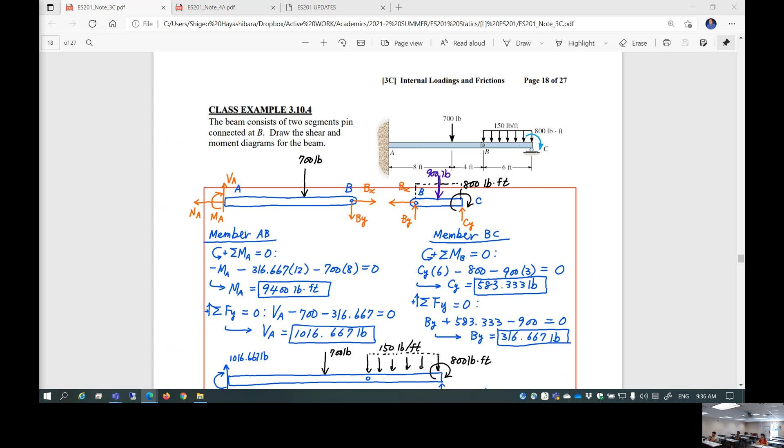Let's move on. I think we stopped at class example 3, case 4: shear moment diagram. Before we draw the shear and moment diagram—this isn't even a simple beam, it's an assembled beam, making your life more miserable. In other words, you have two free body diagrams, and you have unknowns 1, 2, 3, 4, 5. How many unknowns do you have? Anyway, you have more bodies, so for each body you apply up to 3 equations of equilibrium and solve those unknowns simultaneously.

So first, your task is to find out those support reactions. This is a fixed support reaction, this is a pin support reaction, this is pin, and this is a roller support. You have to find out the relevant ones - not all of them, since you're not interested in Bx and Na because those are normal forces, and normal forces don't come into the shear moment diagram, so I don't even attempt to find those. I wanted to find out moment reaction Ma, shear support reaction at A, pin reaction By, and roller support reaction Cy. That's the only thing I found.

Then I assembled it again, trying to construct this as a composite beam. If you assemble it, the support reaction at pin B disappears, because I assembled it up. But this is the external support reaction moment and shear. This is an external support reaction shear. This is externally applied bending moment. This is distributed loading, and this is a point force.

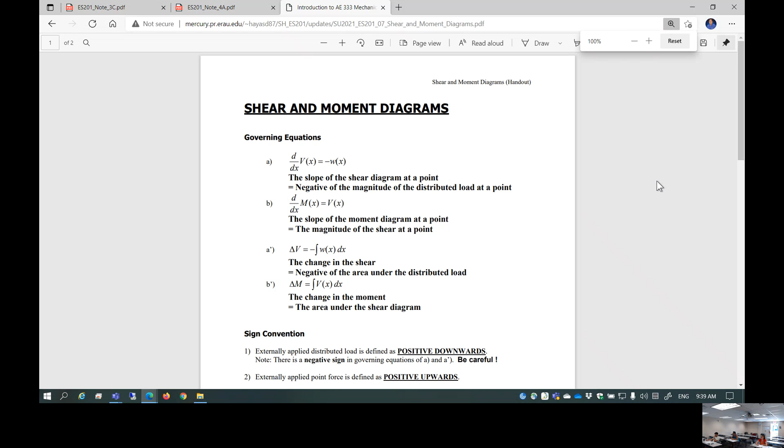So now, starting with the shear diagram, of course you're going to start with 0. And then at the very end, you have 1016.667 shear force going in the positive upwards direction. So you're going to have a jump this much.

So what is this value here? Obviously 1016.667 pounds right here. And then what happens? It stays constant for a while.

Until you hit this force - 700 pounds force. What does that give you? It gives you some kind of change of the shear. What is it? Going down, isn't it? By how much? 700 pounds. Making sense?

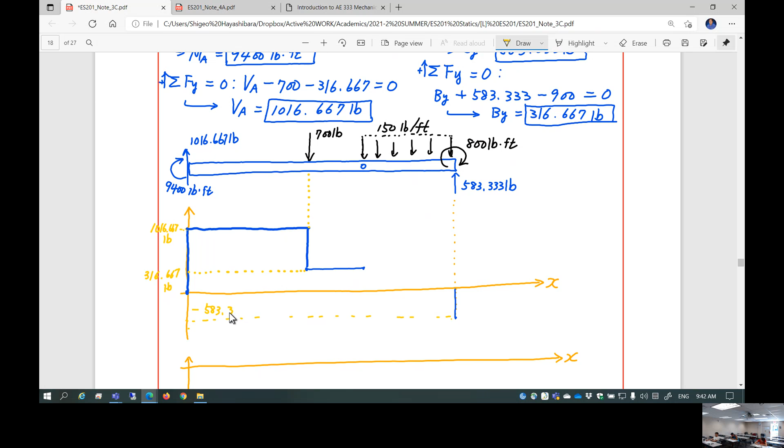What's this value? Minus, yes, minus 583.333 pounds, that's right. And I'm going to draw a straight line in between, with slope negative 150 pounds per foot.

So that gives you this crossing point - do you know where? You can determine this crossing point if you need to, right? You can tell: 316.667 minus 150 times x is equal to 0. What is x? You can find it if you need to. What is x, by the way? I'm kind of curious, so I'm going to do a quick calculation to find out this crossing point.

So this crossing point can be found starting from 316.667, subtract 150 pounds per foot times x, set equal to 0. X equal to, measuring from here... you got it, you got it - 2.11? Okay, 2.11 feet, that's right.

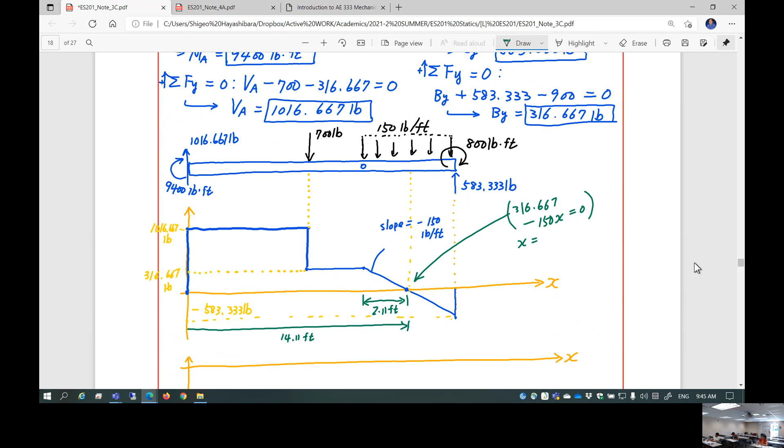Okay, so next is the moment diagram. The moment diagram requires the shear diagram.

Okay, so let's very carefully approach it. First of all, of course, start from 0. Then you have a huge reaction moment that shows up here. Reaction moment 9,400 pound-foot. Is this positive or negative?

This is actually negative. Let's go back and take a look at the handout. So this is positive, okay? That's the sign convention. So let's be careful. If you apply the moment reaction this way, it's going to be negative, okay?

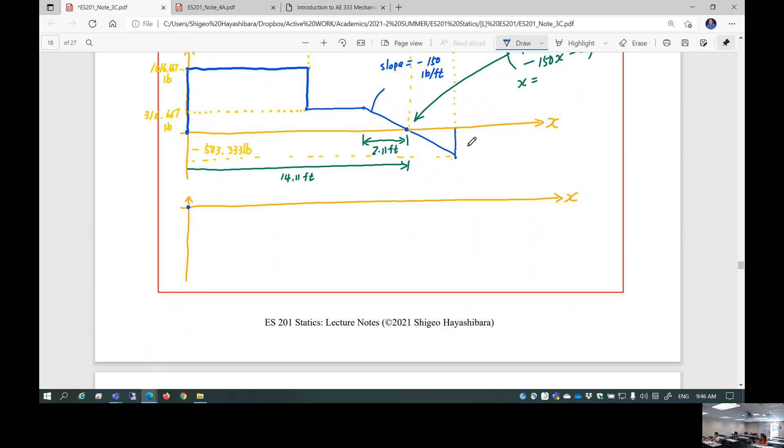Wait, but on the graph it shows a huge drop. That's right, a huge drop in the moment. But that's for it being counterclockwise.

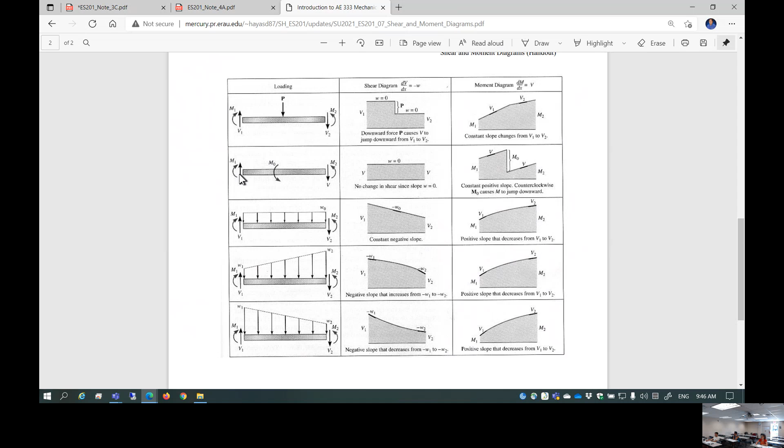Ah, okay, sorry, let's take a look at M1. This is the external moment, the point moment applied. It's going to be negative. That's right, this is negative. That's why it's negative.

So this is going to be a huge drop right here, this much. So obviously you have minus 9,400 pound-foot moment to begin with at the very end. But in here you have the same direction of moment and it goes up. Yeah, it should go up.

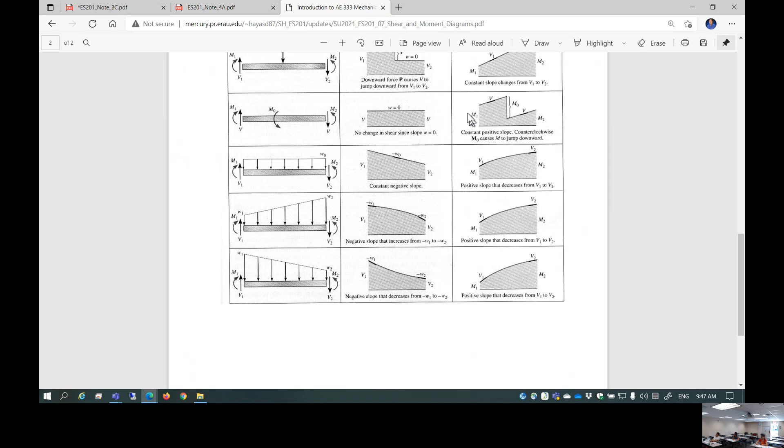Let me double check. Yeah, sorry, sign convention wrong here. Because I'm saying this is unknown direction, and then I said this is positive, and then I got the positive value means this is the direction. Okay.

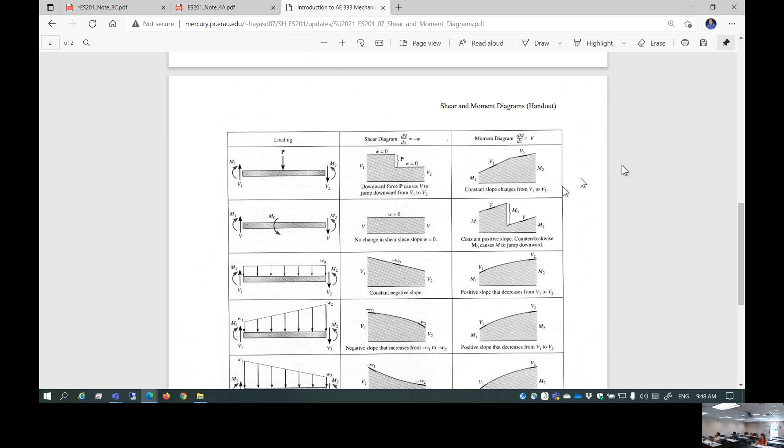I think you should have done minus on the first one when you computed it. So it means that direction, then minus, yeah, I guess so. I think my problem is, okay, yeah, I guess you're right. Since this is a sign convention, I should have done, okay, let me just correct. Since this is a sign convention, this is positive direction, then I got a minus sign come up, right?

So, yeah, that means in reality this is actually opposite. Sorry about that. Yeah, I think so. Good point. So this is in reality the direction, isn't it? Because I'm taking this positive. If I do that, MA comes up negative. Negative, that's right, so that's why negative.

Wait, so did you change the direction of what's positive in the moment? No, this is just basically an arbitrary choice, because I arbitrarily said this is positive or that is positive. That's arbitrary. So I could have taken it like you did in the beginning. I guess the important thing is this is the sign convention. This was just arbitrarily saying, hey, that's just some moment, and temporarily saying this is positive direction. This is not sign convention. This is sign convention, so if you stick with the sign convention, it's actually negative.

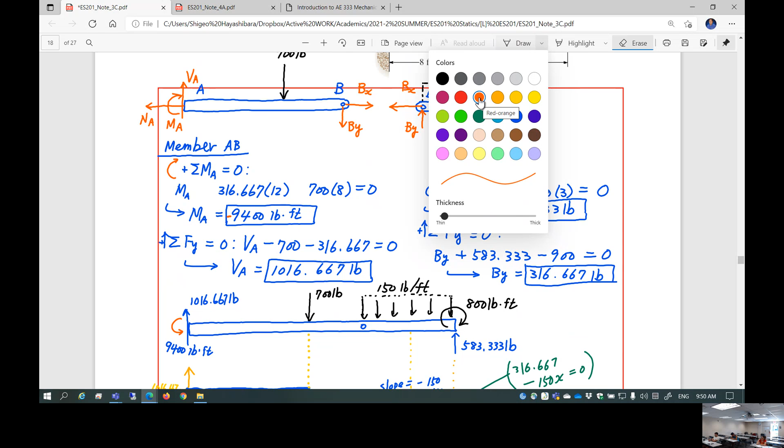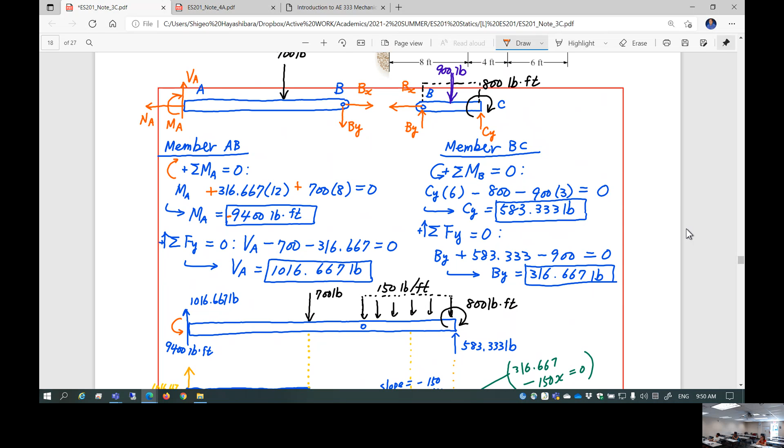I think that's what the problem really is. Okay, so that means let me just fix here, since I took everything in the wrong direction. So this is positive. Sorry about that, so this is positive, and this is positive, and this is positive. Then it's going to get negative. Okay, then following through the sign convention, it's going to be this direction. That is negative, okay. That's what it is, I think. Is that right? I hope so.

Okay, so now this is negative, that's right. Negative jump at the support reaction here to begin with, okay? And then you know that the magnitude of the shear is...

1,016.667 from here all the way to 700 pounds external force here. So you have, okay, you have a linear function with positive slope 1,016.667 from here to there. So from here to there you have a linear function in which you have a slope of 1,016.667 pounds. Okay, it actually gives you the value right here.

What is the value right here? You know this is 8 feet. So minus 9,400 plus 1,016.667 times 8. That is the value here. Still negative, though.

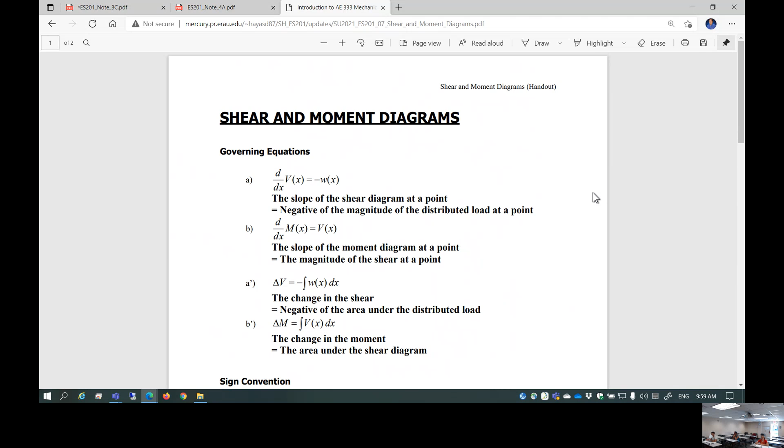So please take it seriously. This is my honest advice for any engineering student because they are bombarded with so many wrong information from peer students. Okay. Engineering could be lots of fun. Major exam could be entertainment if you do the right thing. Okay, all right, anyways, I'm not preaching, so please stop me if I start saying those things.

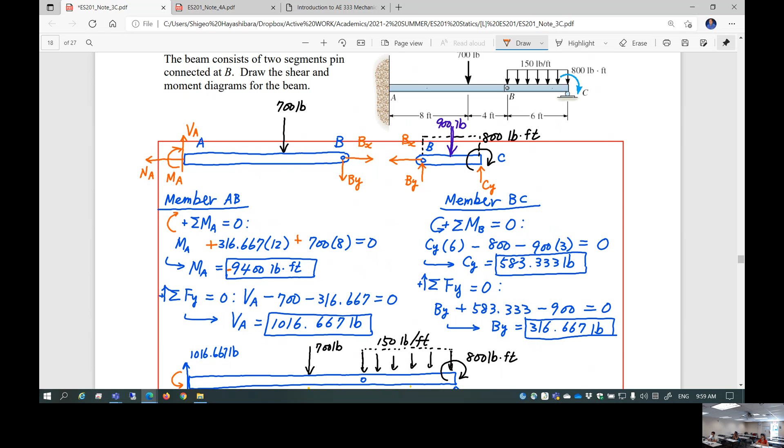Anyways, do you have any question about this shear moment diagram? This is actually challenging because this is a composite beam. You have to disassemble, find out support reactions. That's one thing. And also you start drawing the figure, you have to be very careful about sign convention. I think I even made a mistake in my solution and nobody pointed out in the past. I have to fix it today.

I'm sorry. You're good, actually. You pointed out, I appreciate it.

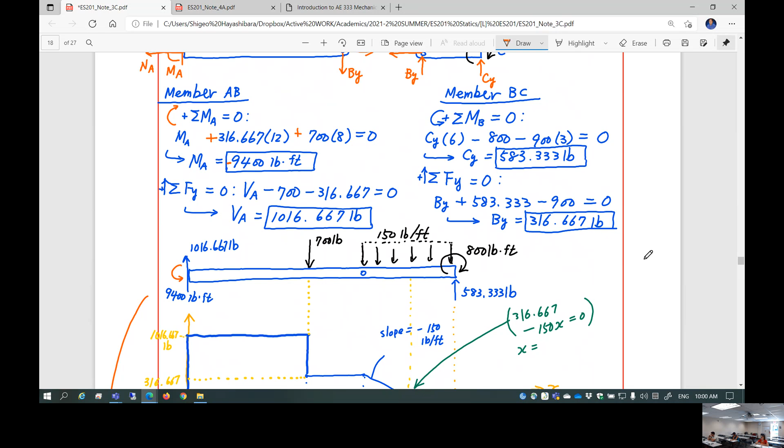Go ahead. So how did you get the area under the curve of that being the 2.11 feet and the 334 pound-feet? Yeah, so you want to have a change of moment starting from this point to that point. You know that the moment changes, delta m. That is essentially integrating the function of this thing. That's what the equation says. Basically, the change in the moment is the area under the shear diagram, which is coming from this equation, which is integration of this equation, right?

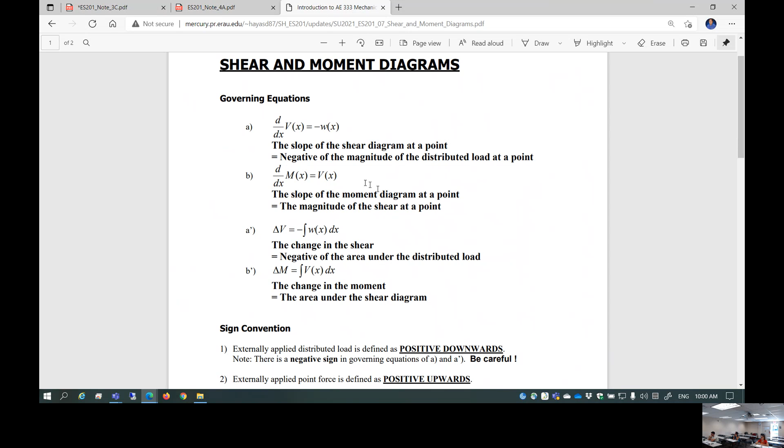Integration literally means that if we plot the function, you're going to find the area under the curve. That means delta m in the range from here to here is basically how much change of shear you have. So this area is equal to this delta m.

This delta m from here to here is this area. And how did you find that area? 2.11 times 316.667 divided by 2, because it's a triangle. Yep, because this is a straight line. So if you were to do an integral, could you do like integral from 0 to 2.11?

No, not 0 to. This is like 12 to 14.11, right, in the range of x. With the function given, you have to figure out this function. This is a linear function, y equal ax, y equal negative ax, and also you have to find the crossing point. That's a linear function. So if you integrate that linear function over that range, that is effectively the area under that curve, which is a triangle. That's why.

Okay, good point. Any other question?

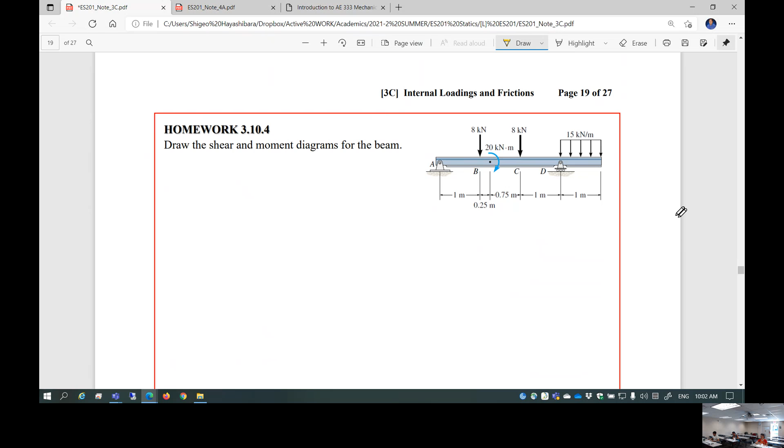Obviously, shear moment diagram requires practice. So this is your homework assignment. Again, this is a simple beam, you don't have to disassemble. This is actually a single reaction force, right? So this is simply supported. So Ax, Ay, Dy. But you have 8 kilonewton point force and point moment applied here, and then 15 kilonewton per meter coming up. So this might take some time, you have to really approach carefully.

All right, next one is also homework. Oh, interestingly, this beam is supported by 2 wires. Now, wire is quite important. You know, wire only develops tension inside. So you have to basically cut and introduce the tensile force developed inside of the wire, and the tensile internal loading developed in the wire. You know it's tensile, and then you know the 45 degrees, that means you know the geometry, that means this is only a single unknown, which is the magnitude. And then magnitude is equal and opposite.

So 45 degrees means that whatever you found this reaction or support force, you are going to resolve into 2 directions, right? This force and that force. You are going to only pick up this force into the diagram. In other words, only shear comes into play. Normal force is equal and opposite, it doesn't come into play for this shear and moment diagram.

Okay, why do we use the 18-inch? Good point, I think there's a big secret in it. Let me just take a look at the solution. Yeah, good point, I appreciate your question. 18 inches, right? Okay, so this is 3.10.5.

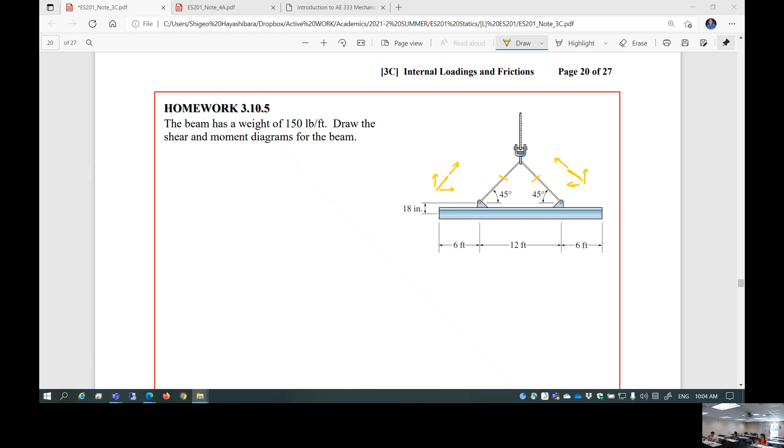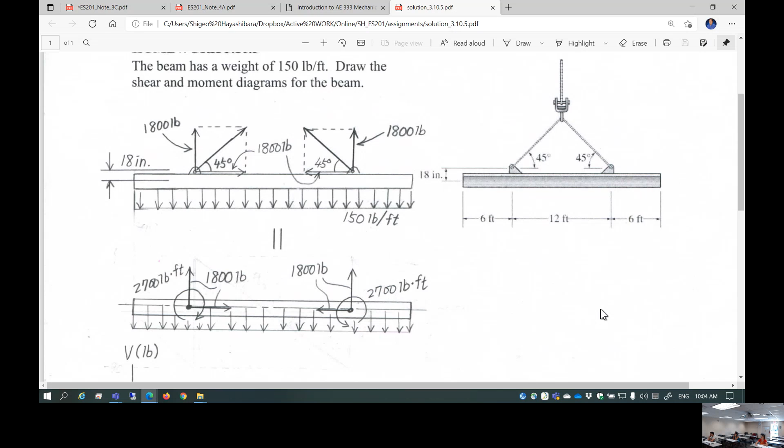Okay, so what I'm doing here is, because of the 18-inch offset — you know what I'm talking about? Because of the 18-inch offset, you actually create a moment because it's offset.

So this is the hooking, this is the point where you attach the rope. This has an offset of 18 inches measured from the center line of the beam. So it actually creates the moment. It actually creates the moment. So don't forget that moment, that actually affects the internal shear moment diagram.

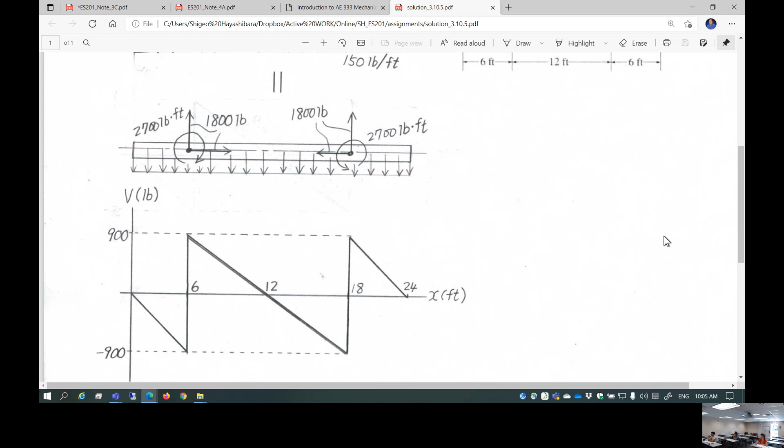Oh my goodness, this is sneaky, isn't it? If he didn't ask the question, everybody would have screwed up this problem, including myself, because I screwed up when I tried to prepare the solution. Very sneaky problem. I don't know who developed it, but cool.

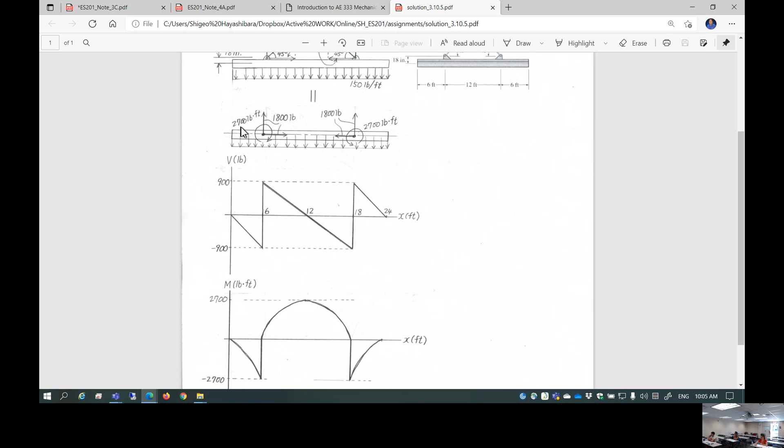So this is the shear moment diagram. Okay, so it's almost like somebody saying 'I don't care' kind of moment diagram. Anyways, don't forget about this moment developed because of the offset of the attachment point. The attachment point here is offset from the center line of the beam where you want to draw the shear moment diagram, which has an offset of 18 inches, actually creating the internal moment at the attachment point. You really need to think about it.

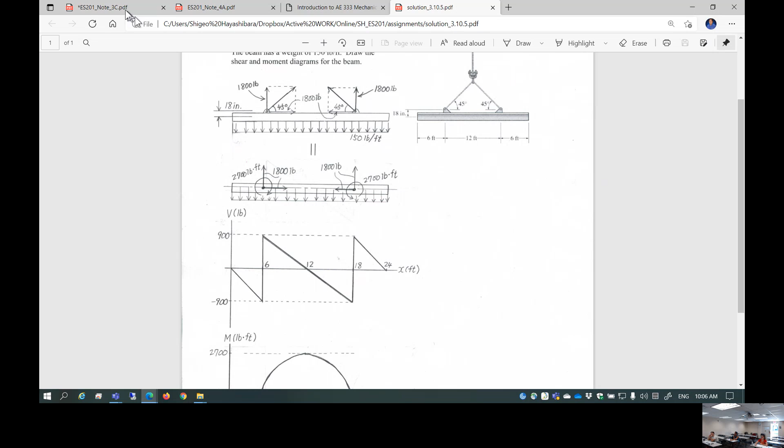Is it good? Is it good? Okay, good, so now you can handle this. Okay, so that's the homework, 3.10.5.

Next page, let's get into dry friction and wedges. We're going to conclude this 3C today. So let's just think about friction.

Friction is quite often considered as a resistive force. When you try to draw a free body diagram, oftentimes you need to consider that the surface touching against another surface actually has friction, which develops a resistive force. In other words, if I try to apply force to move this tripod, it doesn't move until I apply a certain amount of force. Why is that? Because we have a static friction force developed.

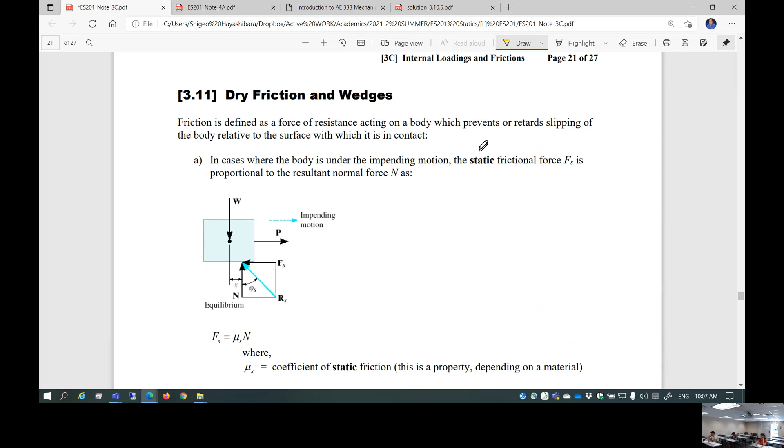Let's take a look at it. Friction is defined as a force of resistance acting on a body which prevents or retards slipping of the body relative to the surface with which it is in contact. This is the first case, called the static frictional force.

Static frictional force, Fs. So this is a body with certain weight, and the weight is acting through the center of gravity. Suppose you try to push this body with force P applied. However, you need a certain amount of force P until this body starts moving, because this body is going to resist your force P by developing static frictional force. Now, static frictional force depends on how heavy this box is, right?

In other words, if you put your box down, you have an equal and opposite reaction force N that shows up. That N multiplied by the static friction coefficient is going to be the static frictional force, Fs. So suppose you have a huge box and put it on a concrete, very rough surface - you have a difficult time dragging it. It all depends on two things: one is how much normal reaction force you have, which is usually equal and opposite to the weight of the body, and then how much friction coefficient you have.

Next, suppose after you have enough force to start moving this box, you still have resistive force developed. This is called kinetic friction force, Fk, because now it's in motion. This is slightly lower than the static friction force.

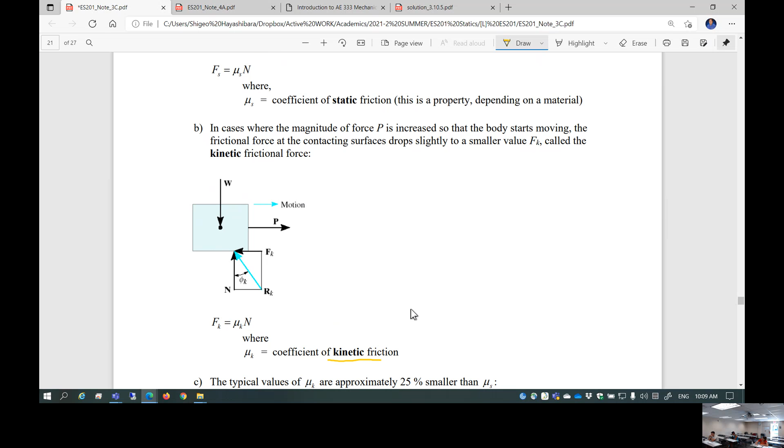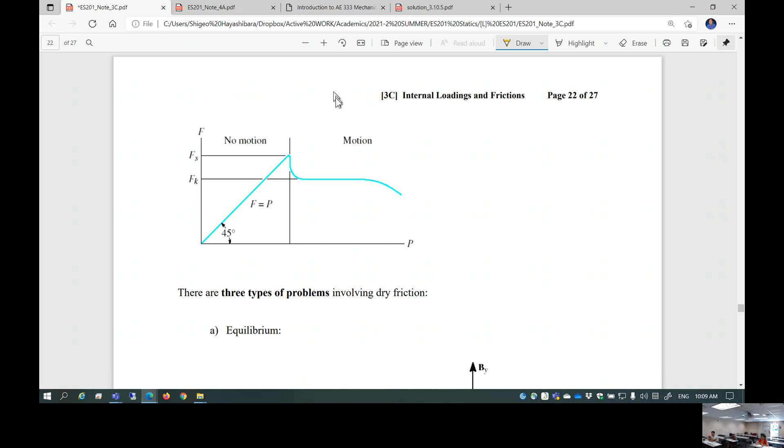Typically about 25% lower. Next page, you can take a look at a plot of the relationship between applied force P and the resistive force F developed because of friction. Obviously, for a static case, if the box is not moving, the externally applied force P is equal to the resistive force anyway - it's an equation of equilibrium, force equal and opposite. But once it starts moving, the kinetic friction force Fk actually drops about 25%.

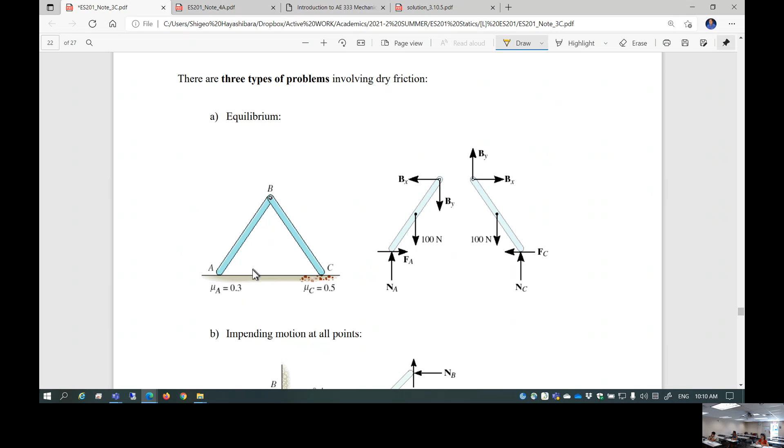So we are going to apply equations of equilibrium to find a few different types of problems. Type 1 is equilibrium. Let's say this is a simple truss structure standing on the ground - member AB, member BC. Point A is touching the ground, C is also touching the ground, and you have different static friction coefficients. So what is the question? How much static friction force is developed at points A and C, that kind of problem. You can solve that.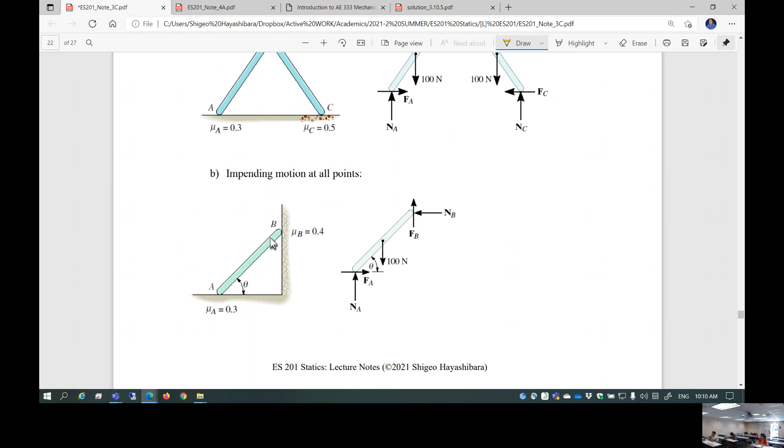Second one is impending motion. You are going to put a bar resting against the wall and then the floor. Those come with two different kinds of friction coefficients. So what is the normal reaction force, and what kind of problem can I think of? How heavy can this bar be if it stays still - if this bar is this much weight, it's going to start slipping, that kind of thing.

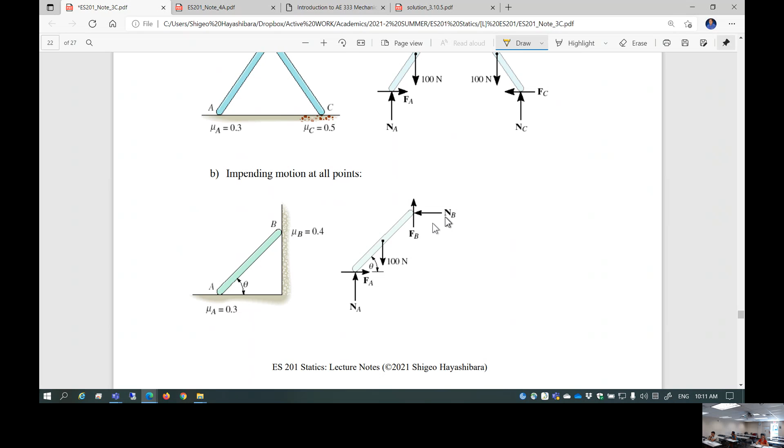So another type of problem is impending motion at some points. In other words, suppose you start applying force P - member BC is going to be dragged, and how much resistive force is developed, that kind of problem. Let's take a look at a few examples.

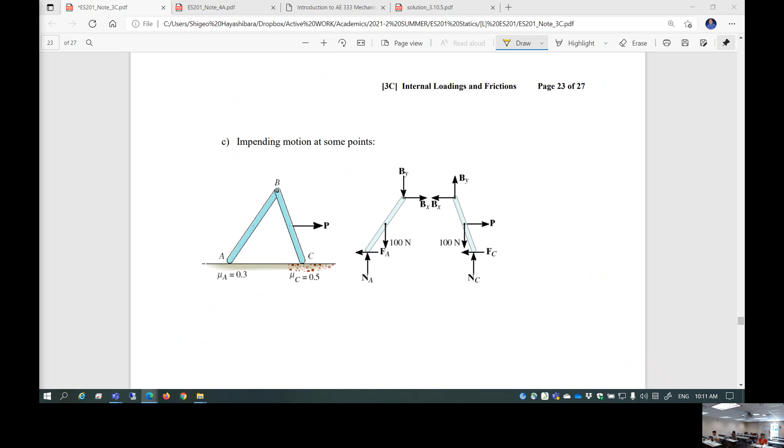This is an example problem of static friction only. Class example 3.11.1: the uniform pole - uniform meaning this pole is made of a single material - has a weight of 30 pounds and length of 26 feet. If it is placed against a smooth wall, meaning no friction, and on a rough floor in the position D equal to 10 feet, will it remain in this position when it is released? The coefficient of static friction is 0.3.

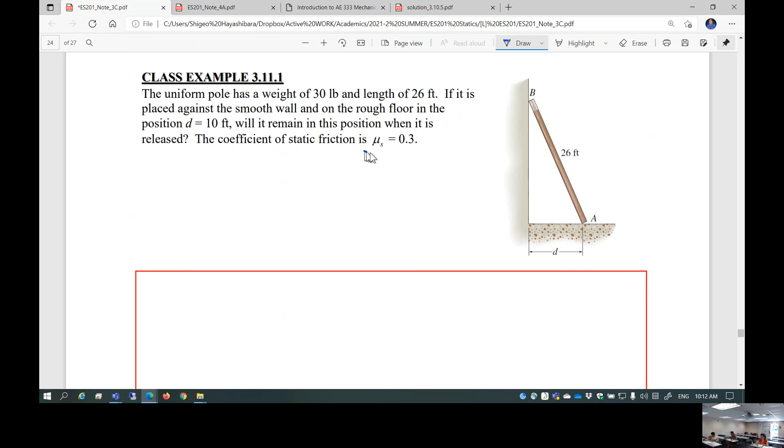0.3 at point A only, I believe - this one is smooth. Let me just double check. So this mu s only applies here, at A. This part is smooth.

Smooth, we assume that the static friction coefficient is about zero. Okay.

Now, important thing is, this is a uniform pole. Weight is 30 pounds. What do you mean? Where does the weight act on this pole? Probably like the center, center of this pole. What is that? Center of gravity. That's right. So if this is uniform, right here bullseye is the center of gravity, right? CG. So how can we determine this CG?

That's the subject of next unit, unit 4A and 4B. We are going to find out what is the CG, center of gravity, center of volume, which is centroid, center of mass, stuff like that. We are going to mathematically determine that kind of geometric location, which is next unit. But right now, this is uniform pole, so it's like a bullseye right here in the center, right?

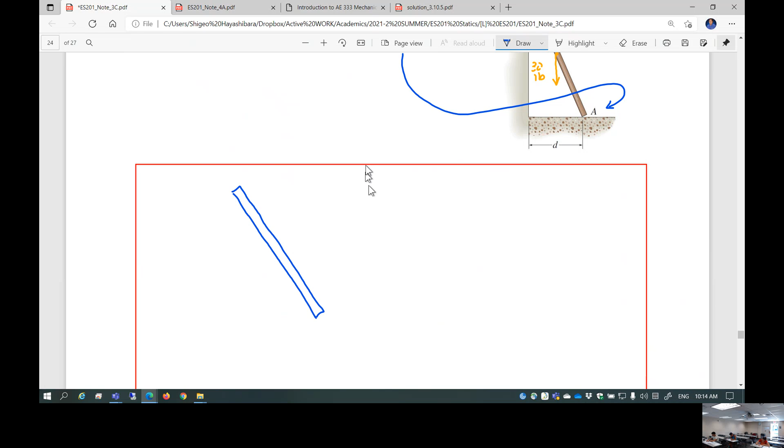So this is where the 30 pounds force is applied. I'm going to draw a free body diagram here. So free body diagram, this is the pole, uniform. And obviously, let's just take care of the geometry first.

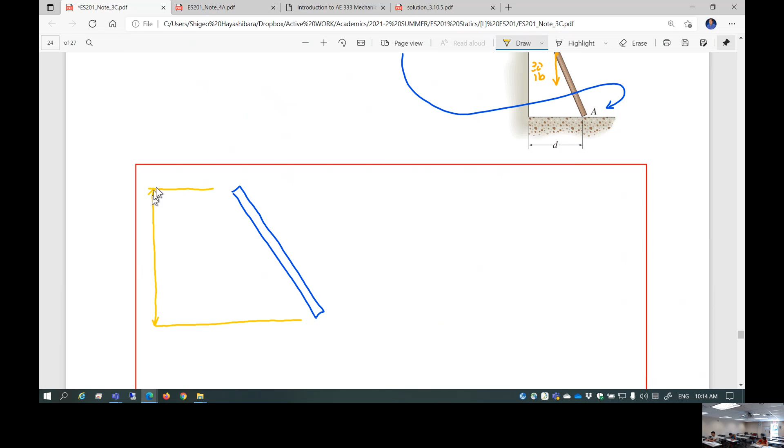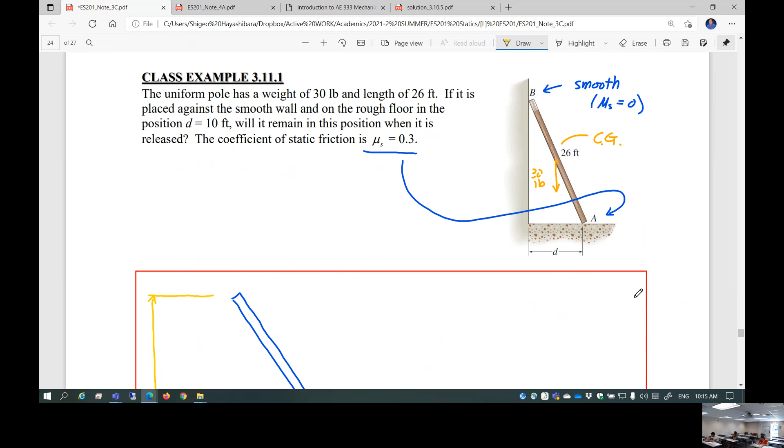Can we get this height? So you're going to take a look at the triangle. This is 26 feet, this is D, so this is the height, D is 10 foot. So this is 26, 10, this height is square root of 26 squared minus 10 squared. So you can get this is 24 feet. Let's just take care of that geometry.

And unknown reaction force, obviously, let's say this is point B. So at point B, you have normal reaction force, NB. Normal means perpendicular to the surface of contact. And of course, right here, right in the center, in the midpoint of 26 feet, you have weight 30 pounds. And then here, once again, normal reaction at location A. This is NA.

And then here, you have to really think about the reaction of the resistive force. This stick, it wants to move to your right, okay? You have to have a resistive force for it. So, of course, you know the direction of friction force here. This is the direction of force, which is against the direction of motion of the pole, okay? So let's call this FA. FA is, of course, mu s times NA. So this is the free body diagram.

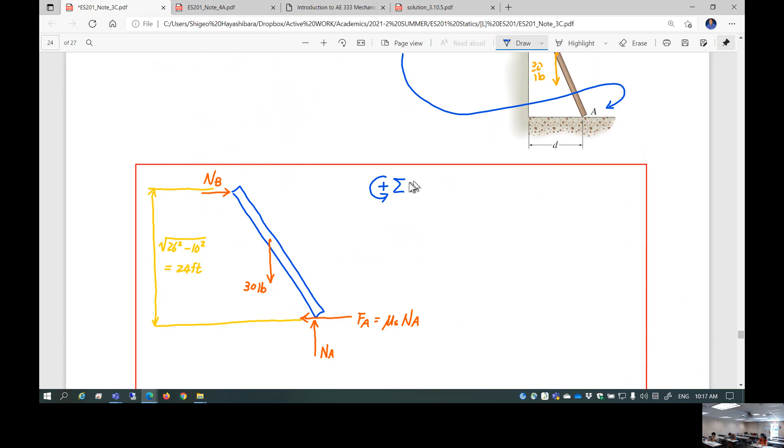Then, of course, you're going to apply up to three equations of equilibrium. I want to probably do as usual. Let's do the summation of the moment at location A, set equal to 0. This is going to give you, well, FA and NA don't come into play because I'm taking a moment at point A. So you have 30 pounds of weight creating positive moment. What is this? This is half of D, isn't it? So this is 5 foot. So this is 30 pounds times 5 foot, creating positive moment around point A.

NB creates negative moment. So negative normal reaction force NB multiplied by 24 feet, set equal to 0. This is going to get you NB. NB is 6.25 pounds. Good.

Let's just do summation of the force in X direction, set equal to 0. Right here, and we do know NB is now 6.25, positive X. 30 pounds, this is Y direction. FA, we don't know, but it's negative direction. Negative FA is equal to 0. Oh, actually, this gives you FA. FA is equal to 6.25 pounds.

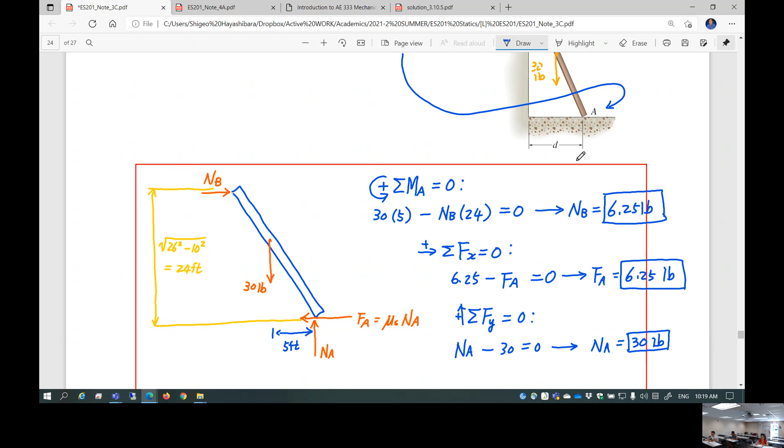Okay, so here's the question. Coefficient of static friction is 0.3. Will this remain in this position when it is released? How do we know? So FA depends on the static friction and also reaction force NA, isn't it? So NA being 30 pounds, you can say max value resistive force of FA is essentially μs times NA. So maximum value is, of course, μs is the static friction coefficient 0.3, NA is 30 pounds. So maximum value is 9 pounds. So required, in this case, 6.25 pounds is way less than 9 pounds.

6.25 is less than 9 pounds. It will remain in the position.

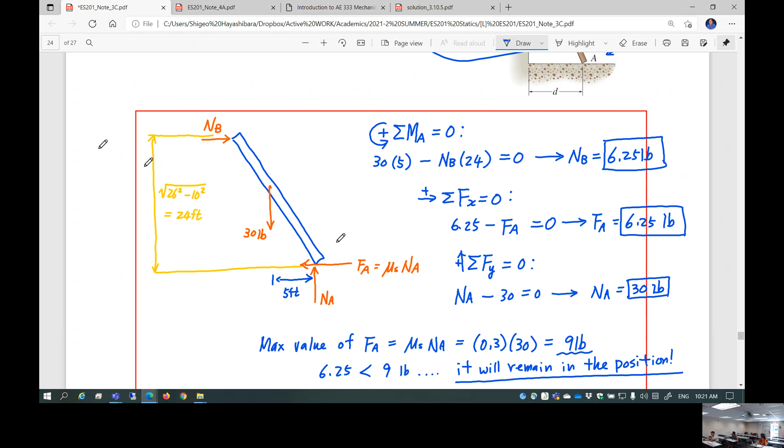Okay. This is easy. Any questions? So friction problem, it's kind of easy.

So next page is homework 3.11.1. Determine the largest weight of the wedge that can be placed between the 8-pound cylinder and the wall without upsetting equilibrium. That means this cylinder starts rolling. The coefficient of static friction at contact A and C is 0.5, but at point B it is 0.6. So this surface is a very, very rough surface.

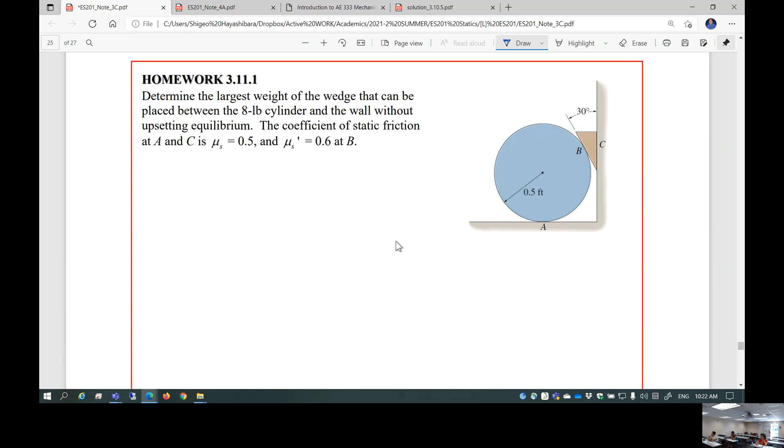So you're going to insert the wedge, but you don't want to start rolling this cylinder. So the largest weight of the wedge you need - this is actually quite simple.

Here's another example, let's just do it. This is kind of similar to the previous homework assignment. The spool has a mass of 200 kilograms. It actually says mass, okay good, so we want to convert it to weight.

200 kilograms of mass. So let's first multiply 200 kilogram times 9.81 meter per second squared, which gives you 1962 newtons. Okay, so let's just convert it to weight.

This one rests against the wall and on the floor, if the coefficients of static friction at A and B are different, 0.4 and 0.5. Determine the smallest vertical force P that must be applied to the cable that will cause the spool to turn.

So you want to lift up, actually pull this cable to try to spin this spool. So the direction of the spin is this way. So this is something you want to induce, the spin. But the contact points A and B produce the friction force to resist it. That's what it is.

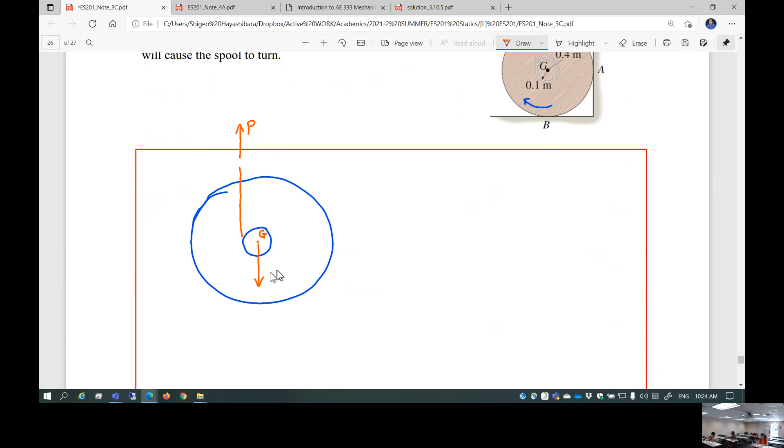So first I want to draw a free body diagram for that situation. So this is the spool, and this is where the rope is attached to. So you're going to pull this rope with the force P. This is the location G where the weight of the spool is acting, and we found this is 1962 newtons.

And obviously right here, at location A, you have a static reaction force, FA. FA is obviously mu A times NA, and this is the normal reaction force NA. Now mu A is 0.4, so let's simplify - this is 0.4 times NA, that's what FA is.

And then right here at point B, you have of course resistive force FB. This is mu B times NB - mu B, the friction coefficient, is 0.5. This is 0.5 NB. Now, of course, you have normal reaction force NB. So this looks like the free body diagram.

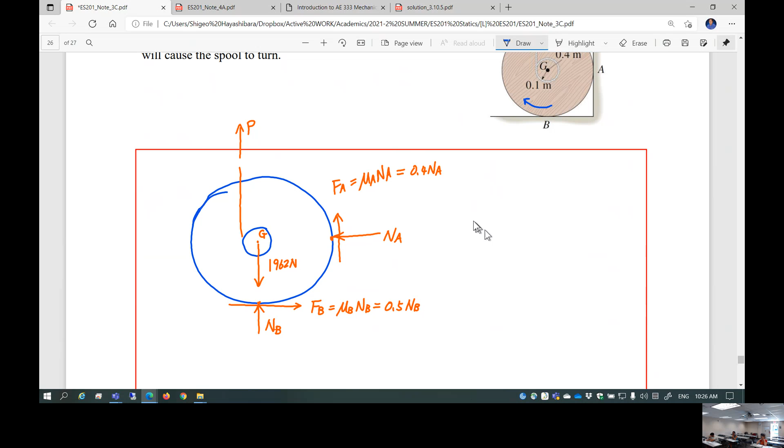Okay, so let's apply the equations of equilibrium. I'm going to start with summation of force in the x direction equal to 0. Let's put this as positive x direction - this is going to be FB minus NA equal to 0. This actually gives you one equation with two unknowns, which is not good, but let's write it: 0.5 NB is equal to NA. So you got equation 1, two unknowns, NB and NA.

Then you apply summation of force in the y direction set equal to 0. Then you have NB plus FA plus P minus 1962 newtons set equal to 0. Let's simplify a little: NB plus 0.4 NA plus P is equal to 1962 newtons. This is equation 2.

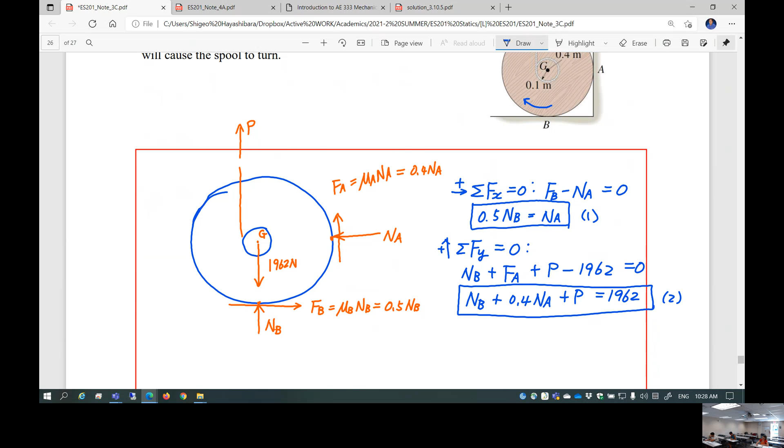Okay, and then obviously you've introduced three unknowns. For the third equation, you find the sum of moments. Let's do it at G. If you set the sum of moments at G equal to 0, what happens is FA times this offset distance - FA times offset distance 0.4 meters, that's the radius - plus FB times offset distance again 0.4 meters, minus P times offset distance, which is 0.1 from G, so 0.1 meter, set equal to 0.

FA is 0.4 NA times 0.4, plus FB is 0.5 NB multiplied by 0.4 meters, minus 0.1 times P is equal to 0. Simplifying one more time: this becomes 0.16 NA plus 0.2 NB is equal to 0.1 P. This is equation 3. Again, three unknowns.

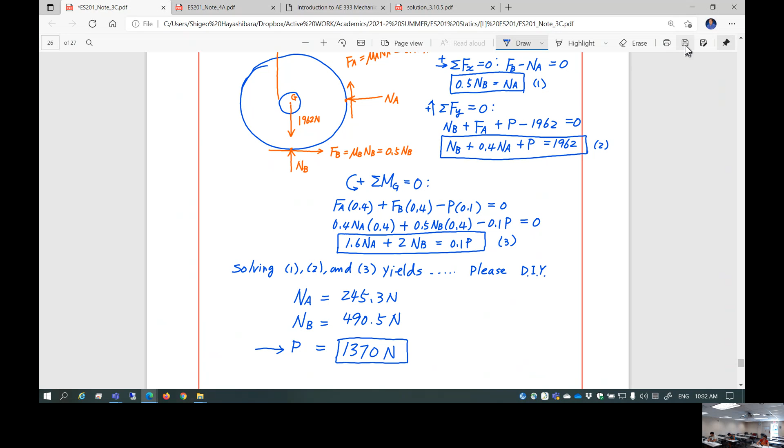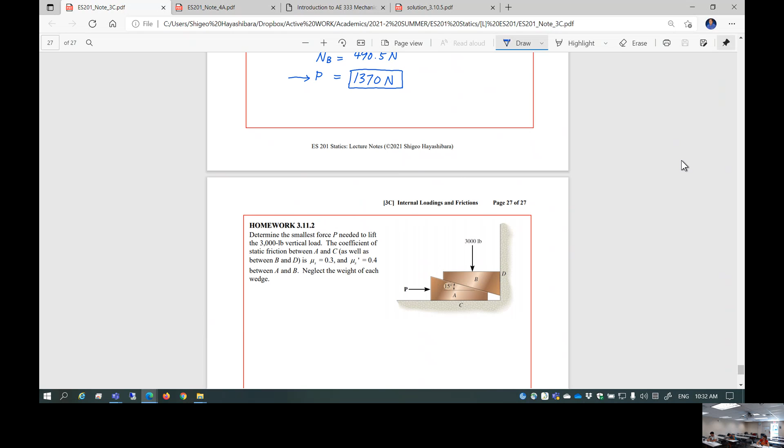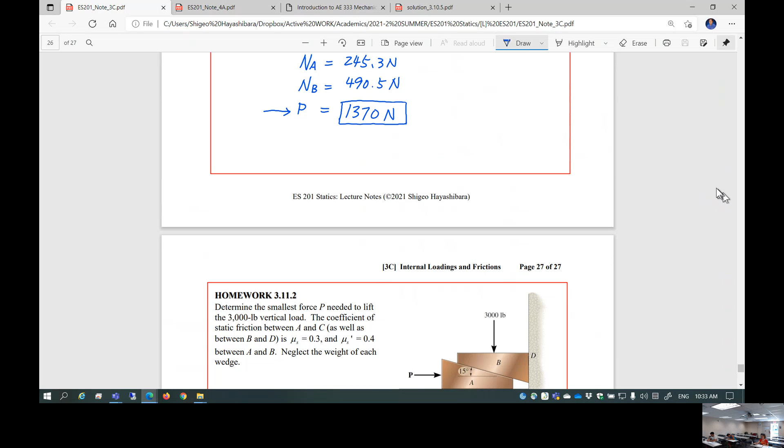Okay, next page is the last page, this is another homework here. Determine the smallest force P needed to lift the 3,000 pound vertical load. That means you need to find out P. It's kind of similar to what we did today. The coefficient of static friction between A and C, as well as between B and D, are 0.3, but between B and A is 0.4. Let's just ignore the weight of each wedge, so that makes it easier — you don't have to worry about the weight of the wedge. It's just basically how much this 3,000 pounds can be lifted up by applying force P here.

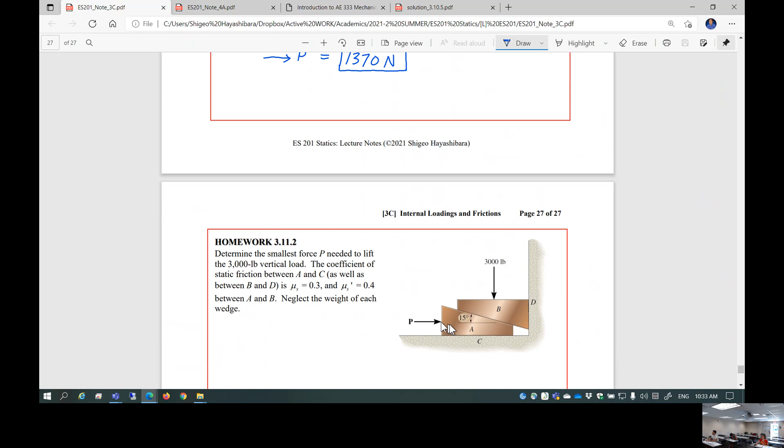Which is kind of similar to what we looked at today. So this is that's it for Unit 3C.

Do you have any question about that? This is a fairly long, tough unit, 3C. 3B and 3C, those are not easy units, right? Obviously, you should expect maybe a problem at least each from 3B and 3C for the final exam. It's time consuming, it's not easy. So how can you be successful for that?

Of course, bare minimum is, I would say, you did every single homework problem all by yourself and check against the solution. That's minimum. If you don't do that, don't expect you can do it in exams, obviously.

And then I intentionally tried to make the exam problems very similar to those problems, could be example or homework. So I guess the standard way to be ready for final exam is, of course, you go through your notes, because we spend most of the time going through the notes, doing exercises, and take a look at the class examples to begin with.

And then the class example is the starting point of doing your homework. Then, of course, you probably need to spend some time, invest your energy and time doing your homework all by yourself. That's important. To me, that's probably the only way to get the real skill set.

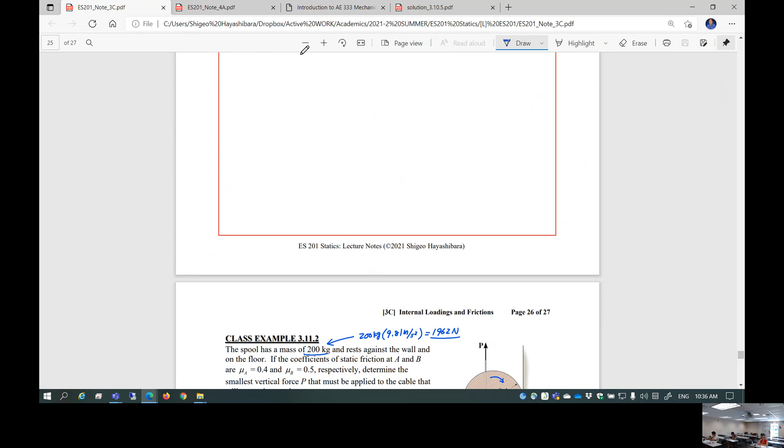All right, so having said that, let's move into Unit 4, 4A and 4B. Those are fairly short units, it's going to be done fairly quickly. And then here's the important thing.

Those are, again, suppose if you want to analyze a machine or airplane structure, frame, or anything, obviously you start with a design. Design needs to be done well so that it's strong enough. You have enough factor of safety, it's not going to break down.

At the same time, you need to come up with some kind of property of geometry. Property of geometry is quite important. In other words, if somebody gives you this volume, where's the center of gravity of this volume? Suppose if you look at an airplane, where's the CG location? That's what you're kind of frantically trying to find when you design an airplane in your senior year.

Location of center of gravity is everything. Your airplane may fly or crash right after you take off. It all depends on the proper set of location of center of gravity, distribution, loading, and then appropriate mounting of engine and everything. You know, it's not simple stuff, but you need to understand how to get those things.

Okay, so we are going to begin with the very conceptual, easy thing. What is the concept? Somebody says, okay, center of gravity — so what the heck is center of gravity, anyways? What is the concept? It's just to set that concept right. So in this unit 4, 4A and 4B, we are going to talk about center of gravity and then centroid.

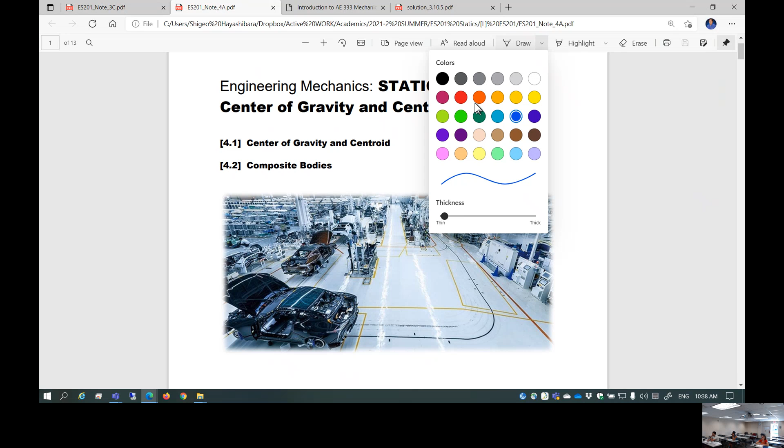Suppose if you are given a real shape like an I-beam, how can I find the centroid of this composite shape? There's a method, something called the parallel axis theorem. This is the key term, let me just give you the key term to begin with: parallel axis theorem.

This is a key term you have to master.

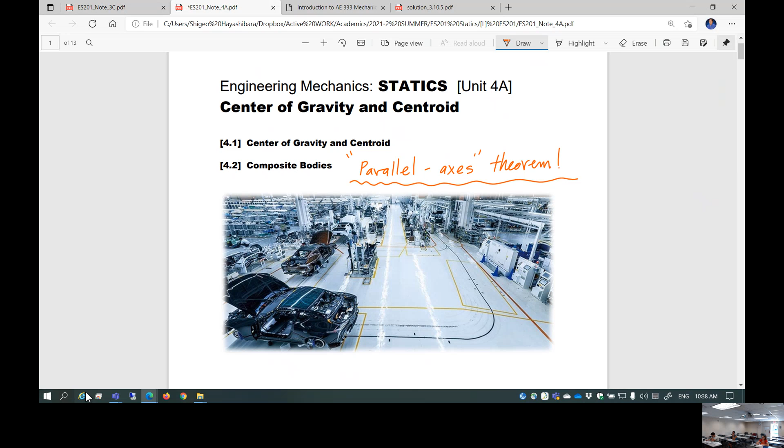If you're dealing with composite bodies, of course you're going to apply parallel axis theorem. Composite bodies, even though it looks composite, it is composed of many simple shapes. An I-beam is made up by a bunch of rectangular shapes. So each one of those rectangular shapes, you can find out where is the centroid. Each one of those centroids, if you know it, you can get the centroid of this whole thing. That's called parallel axis.

So what is the center of gravity and centroid? The center of gravity, we are going to use the letter G, or sometimes called CG. That's the location where the resultant weight, maybe the weight of a system, acts through.

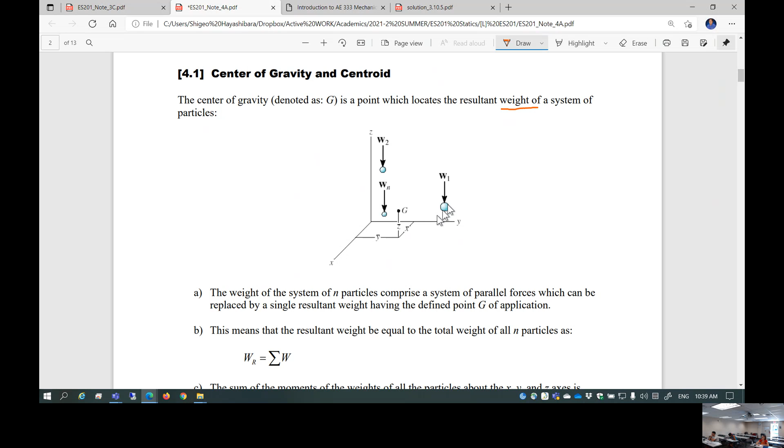In other words, suppose if you are looking at 3 particles here in 3D space. Where is the center of gravity of those 3 particles? It's right here, G. How do you find such a thing? Of course, you are going to find out the summation of all the weight, which gives you the resultant weight.

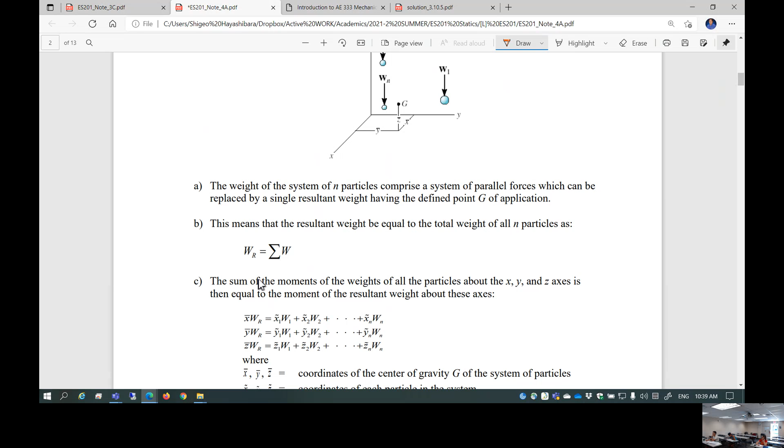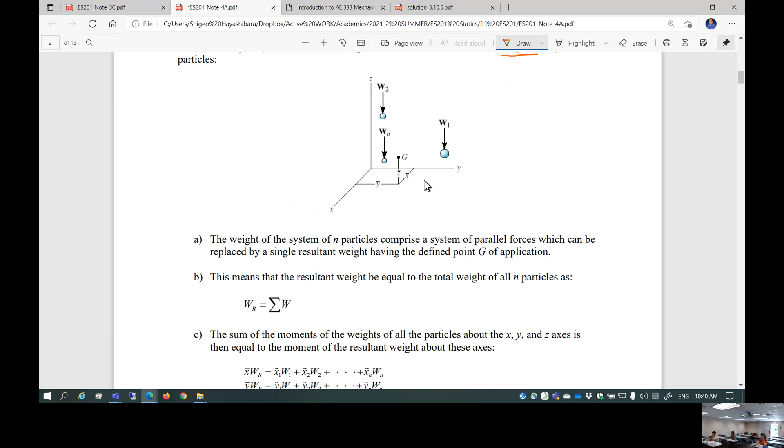And then each one of those particles actually creates a moment, right? Because weight is a force going down in the negative z direction. So this force creates a moment about x, a moment about y, but not a moment in z. Moment in x and y is created by each weight of each particle.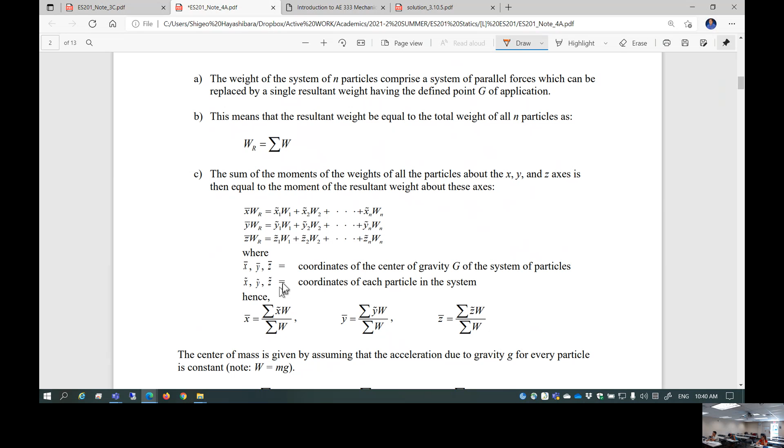So you're going to add up all of those moments, and then find the location of x bar, y bar, z bar by taking the moment divided by the sum of all the weight, which essentially defines the coordinate of the center of gravity. That's why this equation comes up: summation of all the moments about each axis divided by summation of all the weight.

This is x bar, y bar, z bar. This is the location of the center of gravity. Now, center of gravity is based on the assumption that the gravity acting on all of those particles is the same, in other words, gravity is constant.

But oftentimes, if that's the case, we're not going to use the term center of gravity. If the gravity is not constant, we're going to use instead the center of mass. That's right, the center of mass.

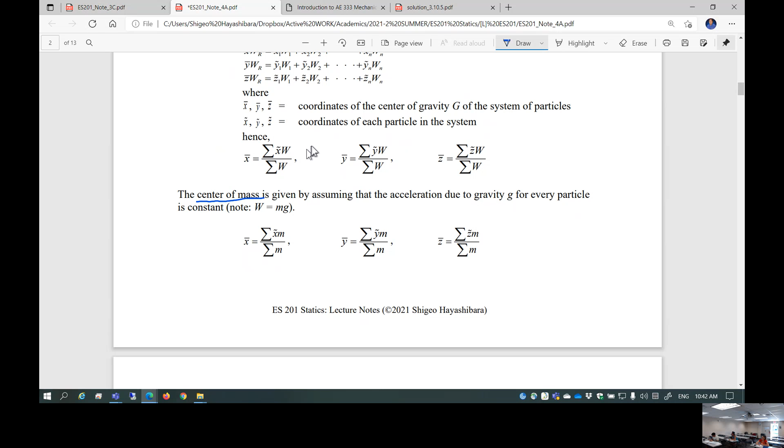So it looks like the same equation, but it's not. Instead of using weight, since weight is mg, you're going to use m, mass, because g is constant so you can cancel it out. In the numerator and denominator, the g's cancel. That's right, this is the center of mass.

How about an arbitrary body? A rigid body of anything is composed of many particles. Particles create the body. So now, instead of summation, you're going to do an integral. You're going to pick a small, tiny volume, dV. This small, tiny volume introduces a small, tiny weight, dW.

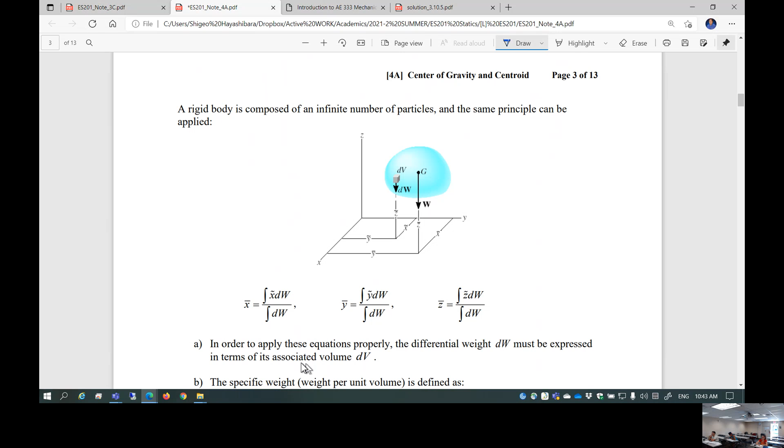So you're going to integrate over the body. You have to be very careful. If you try to integrate this small, tiny weight over the body, what kind of integral do you expect? This is a triple integral. So if it's 3D, if you want to find the center of mass, gravity, or centroid, you have to deal with a triple integral over the volume, if it's a 3D body.

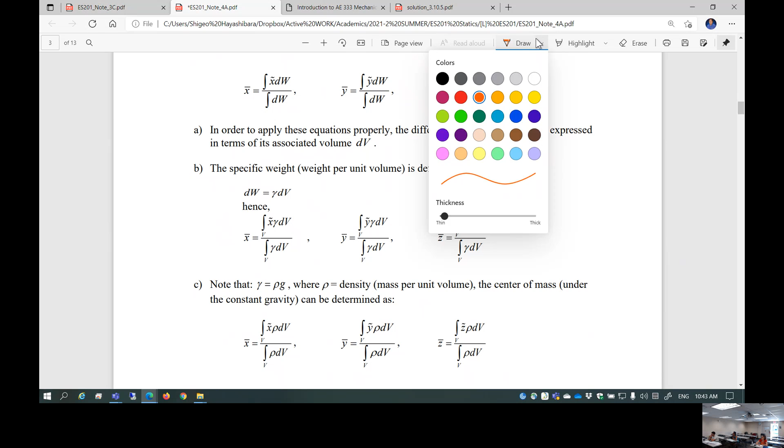Let's think about a few specific terms. We are going to introduce specific weight, which is weight per unit volume. We use the lowercase Greek character gamma for specific weight. By definition, this is how much weight you have for a given volume, V being volume.

Specific weight is actually density times gravity. So specific weight is used instead, where dW equals gamma dV.

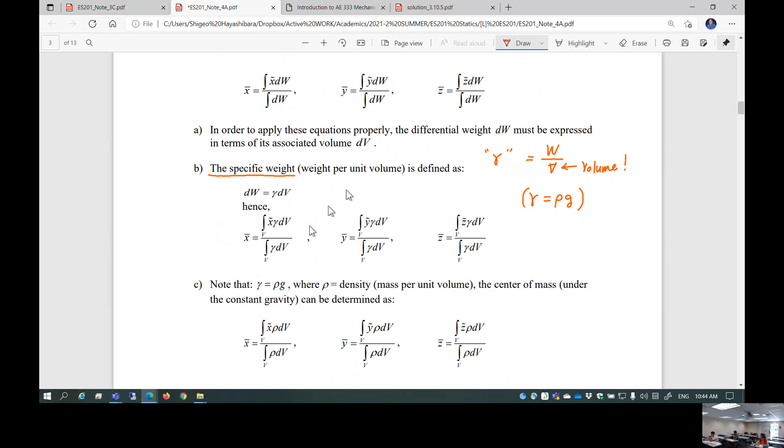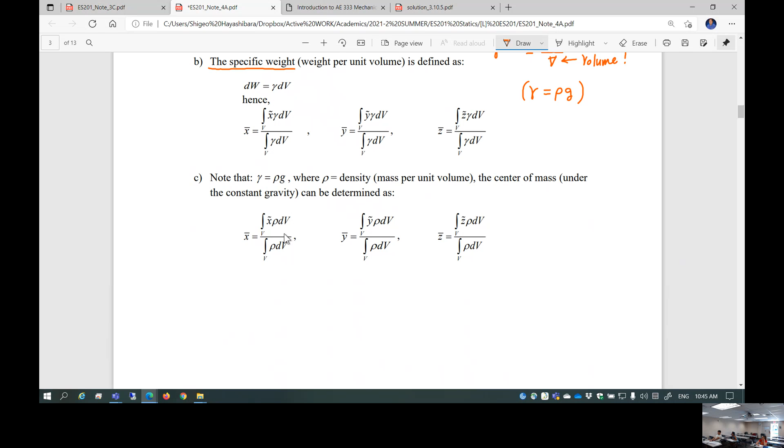This gives you density, and density can be used. Suppose density is mass per unit volume. The center of mass can be given by density. If the density is given for a body, you can determine the center of mass by integrating the density over the volume. This is the center of mass.

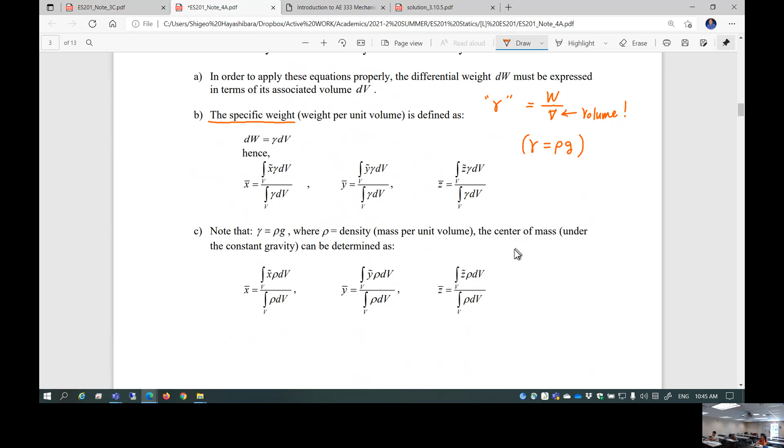There are many variations in the location of center of mass. For center of mass, the assumption is gravity is constant, which is why you can use density instead of weight. So here are the actual equations.

Next is centroid. Centroid is just a geometric center. In other words, if you're given a body of some geometric shape, where is the geometric center of that body? You're not talking about material, density, weight, or anything—just a volume, area, or line. Where is the geometric center of that given entity? That's called centroid, purely geometric.

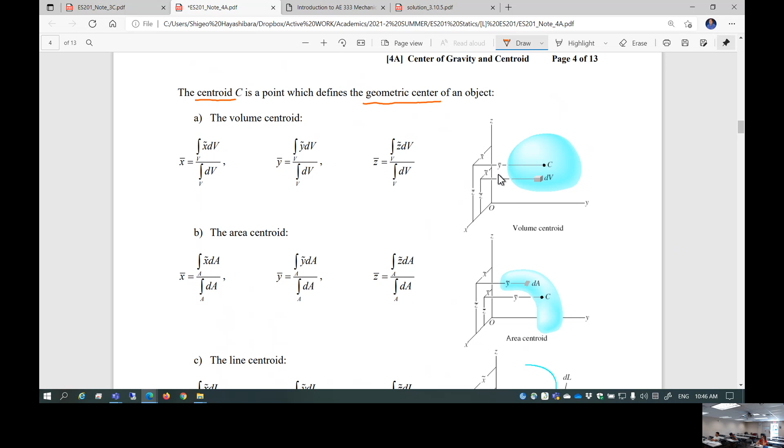If the geometry is given as a function, you can determine the centroid mathematically by integrating that function over a given volume, area, or line to determine the location of centroid. This is one of the primary operations of solid mechanics—almost every problem asks, where is the centroid?

If you're dealing with a 3D body, this is a triple integral. For a 2D body, it's a double integral over the area. For a line, it's a single integral.

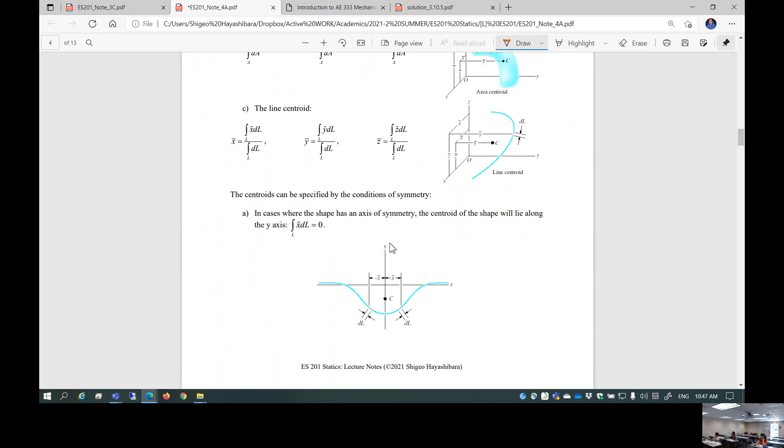The centroid can be specified by conditions of symmetry. If a shape has an axis of symmetry, the centroid lies along that axis. This body is symmetric about the y-axis, so the centroid lies along that line. If a shape has two or three axes of symmetry, the centroid lies at the intersection of those axes. For example, this I-beam's centroid is at the crossing point of the x and y axes of symmetry.

It's a bullseye. For this 3D body, the centroid lies at the intersection of the x, y, and z axes of symmetry. It's simple for a symmetrical body, but for a non-symmetric body, the calculation becomes a nightmare.

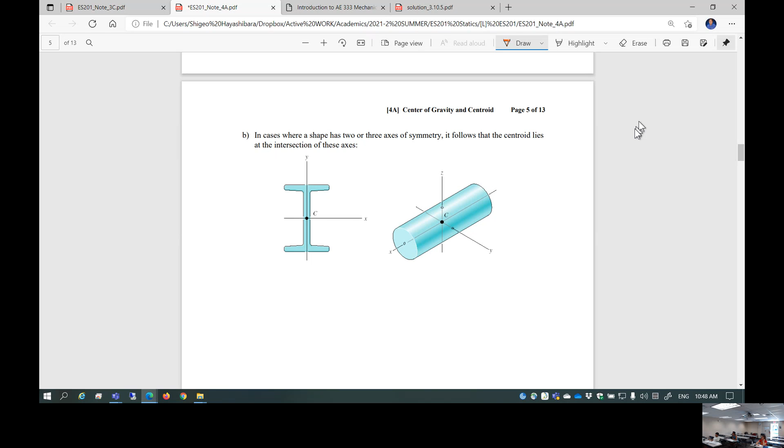Coming back tomorrow, which is an online day, we are going to deal with class example 411. I'm not going to do any hand math these days—for example, integrating over the square root of 4x squared plus 9, I'm not going to do this.